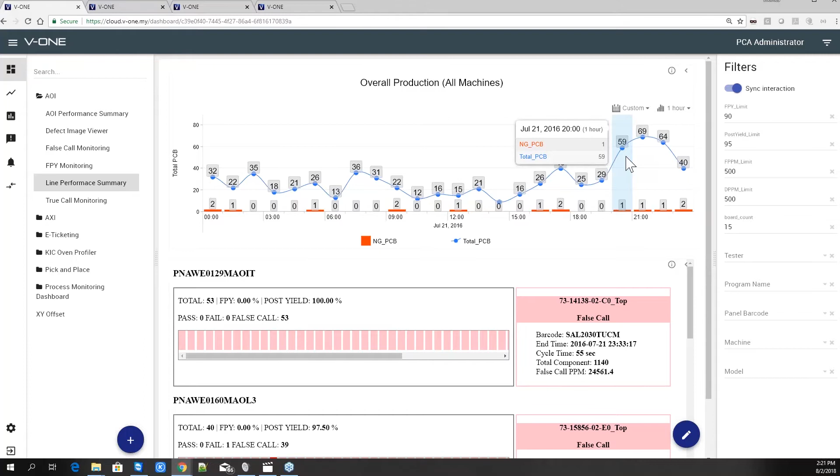So from here, as you can see, for the whole time trend, every single hour, the total NG-PCB and the total PCB inspected will be displayed, as well as, for that particular machine, the past 100 boards - how many false calls, how many true calls - and what model is currently running, what is the cycle time, total component, and so on.

This can basically help you to monitor your line in a real-time basis. The false call analysis allows you to analyze the false call by top part number, by device type, by reference designator, and there is also a pie chart for the false call breakdown. You can click on the model, and then all the other charts will filter accordingly.

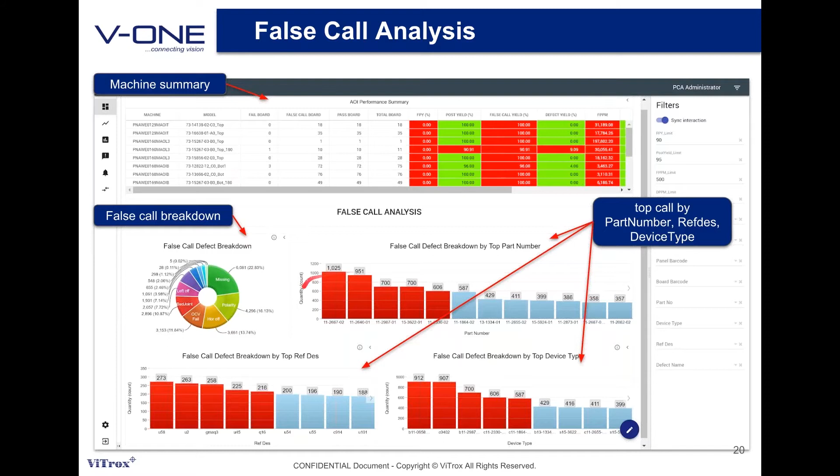This is what we call an interactive click. Besides that, we also allow you to do a right click on data you're interested in. For example, if you would like to understand the top part number causing the false call for that particular model, you can right click on that part number and click on the false call image list, and all the images for that particular bar will be displayed.

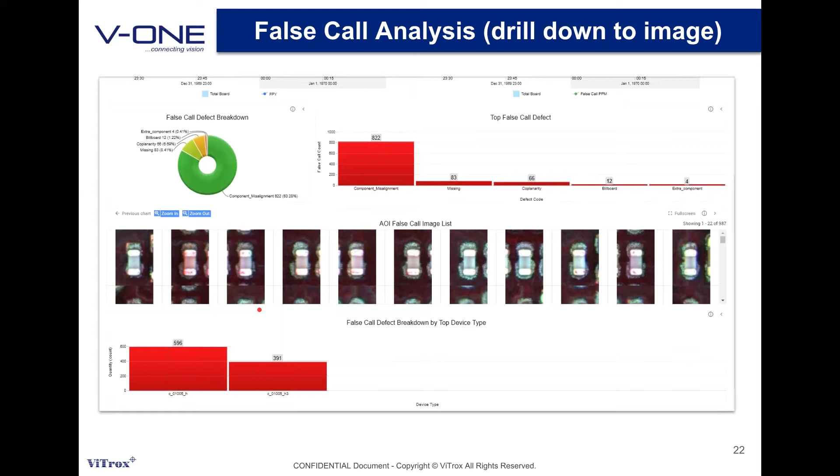Let me show you the live demo. For example, if this is the model you're interested in, when you click, the whole false call analysis chart will be filtered according to that particular model.

Same as this dashboard, if I'm interested in the top part number, for example this particular part number, I can right click, drill down, false call images list. You click on that and you can see that for that particular part number, all the images will be shown. This is very useful for engineers to do debugging on what is the top failure in the line, in real-time, easily.

I hope that this automatic synchronization, as well as the right-click drill down to images, can help production take immediate action to react to any abnormality found.

We also have a defects images viewer. This is also requested by a lot of customers.

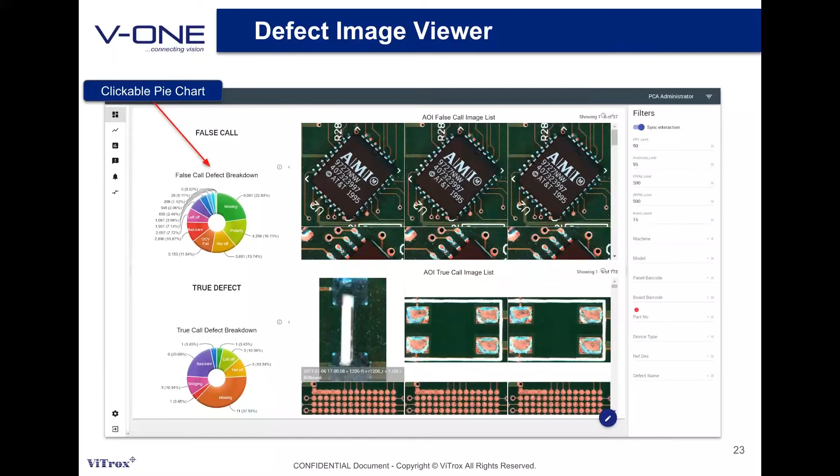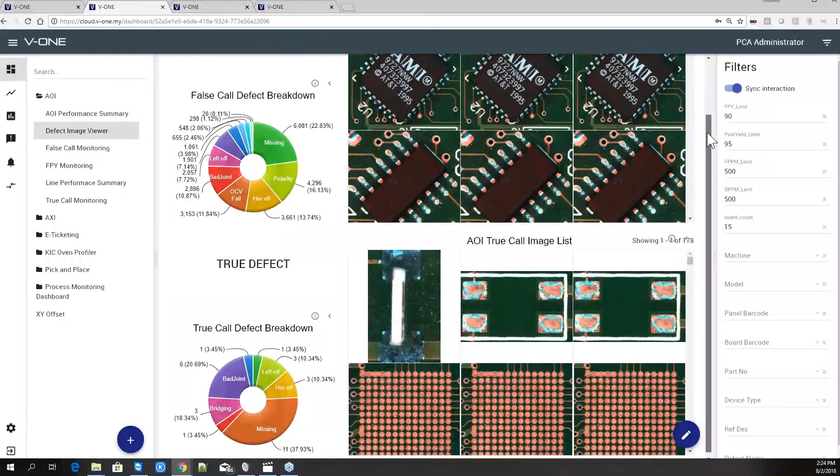With the interactive click, you could limit that particular information to maybe the last 1 hour. When you find that there are lots of missing, for example, you can click on that, and the whole image chart list can be filtered accordingly based on what you're interested in.

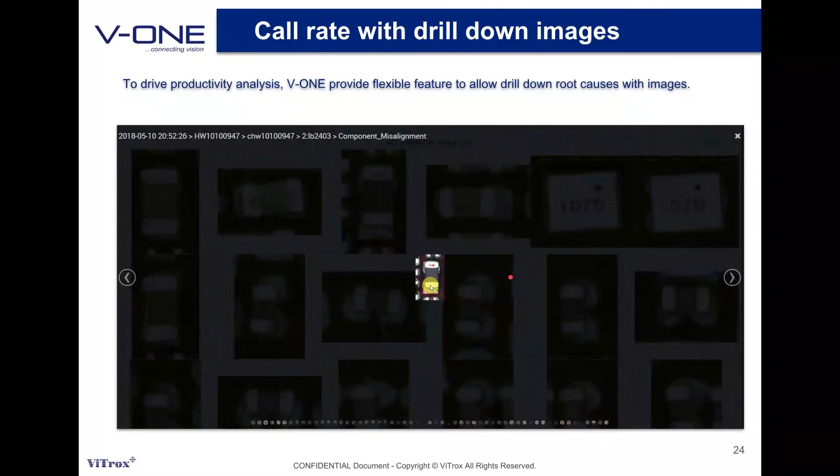This is a drill down. We have been promoting this a lot during version 2, but version 2 was unable to allow you to drill down components for that particular top defect to the images. It is now available in version 3.

For example, if you put a board into the machine, whenever it touches the sensors, the information will be generated and pushed to the cloud server. Then you are allowed to access the cloud server to take a look at the real-time status happening for that particular machine.

In the past, in version 2, we only had one of the features, such as the machine utilization calculation, as well as the real-time boards running on the line. But today, we also make it available for you to take a look at the summary of the utilization.

For example, let me select one of the machines. This is a summary dashboard on how you take a look at the daily machine utilization.

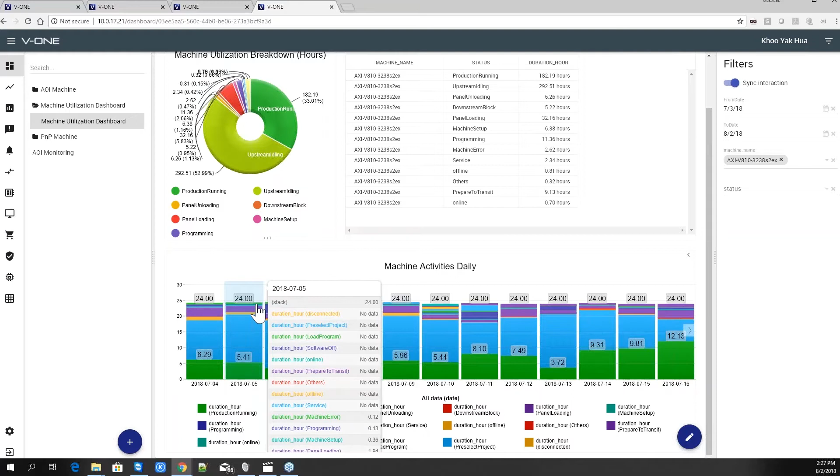From here, if I'm interested in how much downstream block, 5.22 hours, I can click on that, and because of the automatic synchronization feature, you can easily analyze what the downtime is across every day.

This is a very powerful feature for management in order to track whether they are utilizing the machine correctly, and this can basically help you improve and optimize your line utilization.

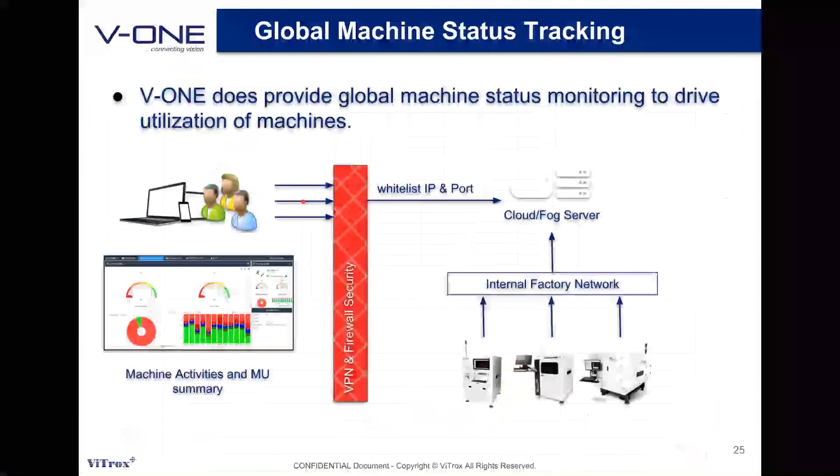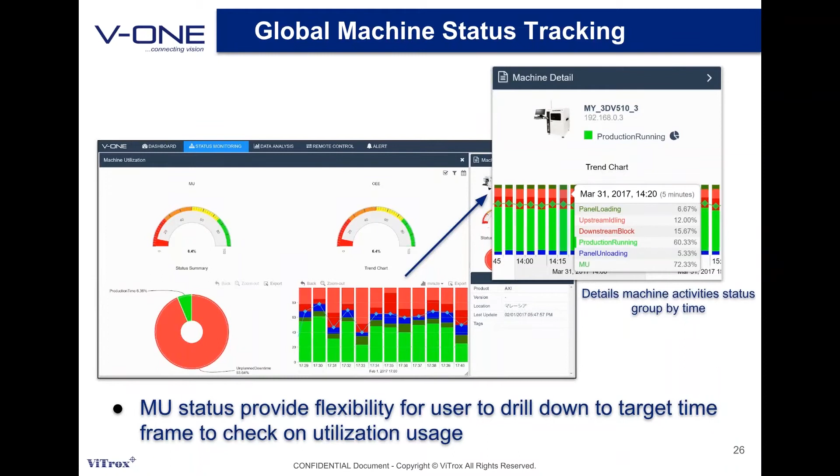This has the same features as version 2, where you can also drill down to that particular minute to see what happened on that particular machine. We have a lot of real-time monitoring dashboards that allow humans to take a look and drill down to the root cause.

But we are unable to ask the technician to always monitor that particular dashboard. With the upcoming version 3 features we are going to launch, this feature basically allows the production to drive real-time actions. For example, we have 2 lines, and moving towards Industry 4.0, we are going to reduce the technicians to only 1, whereas previously we had 2 technicians taking care of the line. From here, a control center is set up, and the V-ONE is installed.

If there is any abnormality, error, or high false call happening in the line, all the real-time data will be displayed in the control center. This is how one of our customers set up their production floor, running today. It helps them a lot to reduce their cost accordingly.

They have one operator controlling the control center. Whenever there's any abnormality found, the operator will open a ticket, and that ticket will be delivered to the technician's mobile phone in real-time. We will show you a live demo later on.

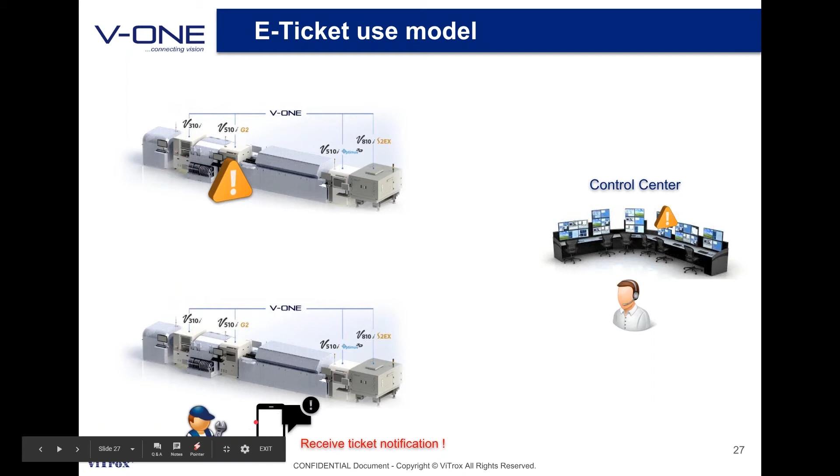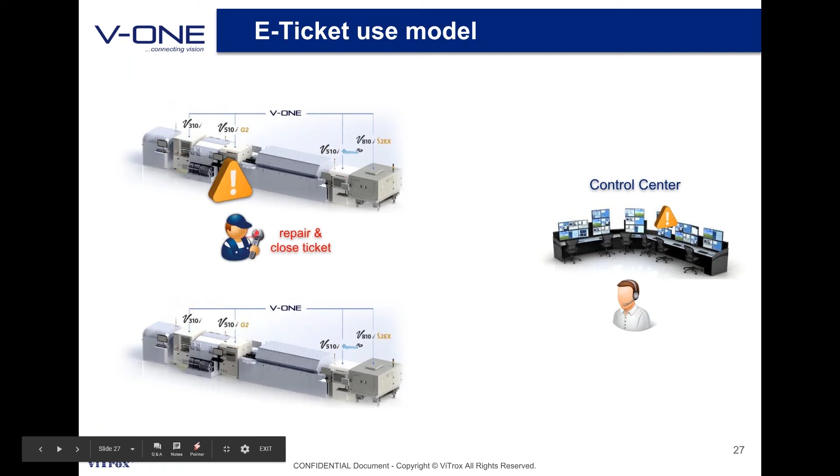So when the technician receives the notification, it tells them the problem is happening in line 1, and the technician will go over to line 1 to fix the problem. Once the problem is fixed, the technician can key in any comments or actions taken, then close the ticket, and finally the control center will receive confirmation that the problem is resolved.

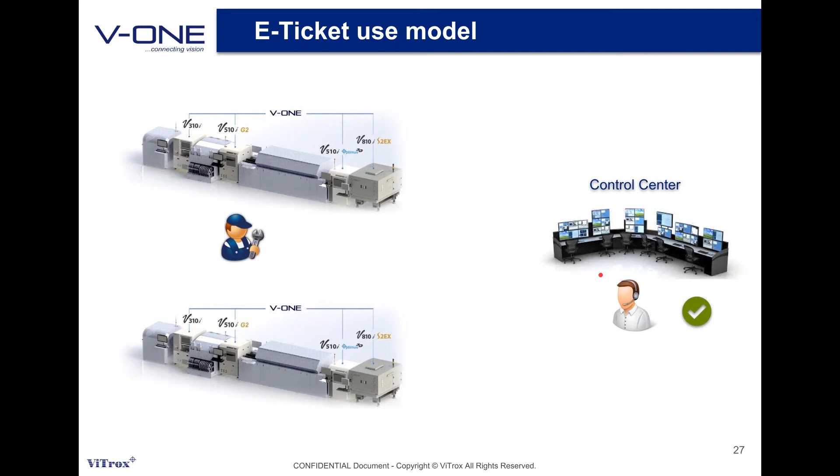From there, you can also generate a report for future training purposes. This is one live example that our customer is using today.

Whenever there's an AOI yield drop, we can either ask the operator to open the ticket, or set up an alert plan to automatically trigger this ticket from the system. For example, the username root represents an automatically triggered ticket. The tag category is AOI yield drop, from line 1, showing which machine. The problem is production yield drop.

Previously it was 99%, currently it's 98%. The issue shows which model, total boards run, pass boards, and fail boards. From here, the technician can take a look at what the problem is.

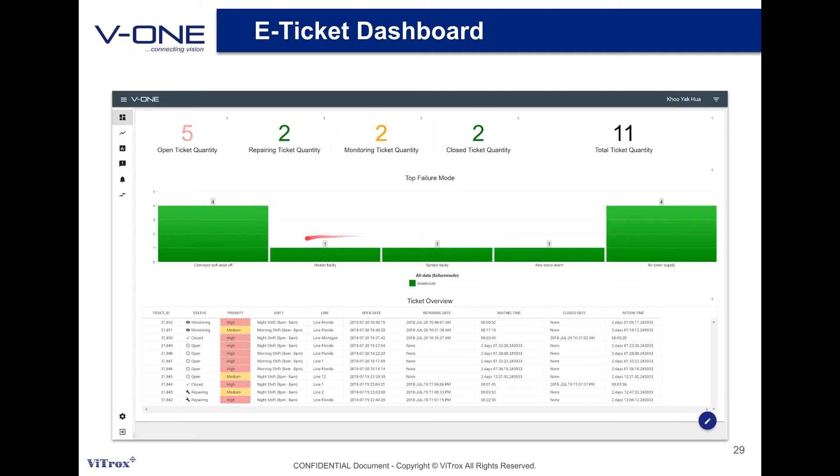This is the dashboard used by the operator control center. It displays how many tickets are open, currently repaired, monitored, closed, and the total ticket quantity for today. There's also a breakdown Pareto of different kinds of issues, as well as details of the tickets shown for today. I'm going to show a demonstration video.

Introducing the latest Industry 4.0 solution. Now enhanced with a mobile app version that will help you optimize your manufacturing process in real-time, alongside advanced features such as e-ticket notification.

When there is a problem with your machine, you can create a new ticket through the mobile app or other devices. There are a few customized e-ticket templates provided in V-ONE. You may request the V-ONE team to build a new template that specifically caters to your needs.

It is hassle-free to create and assign tasks to the engineers or user group of your preference. Once the e-ticket is submitted, the assigned engineer will receive a ticket notification on mobile simultaneously. They can add comments or mark it as repairing for the e-ticket progression.

After the stated issue has been resolved by the engineer, they will indicate the reason or remark to the manager for reference. The manager will receive a reply notification instantly. They can add comments, mark as monitoring, or mark as closed upon the issue. With these new features, your dream towards a no-touch line and smart manufacturing will be fulfilled in no time.

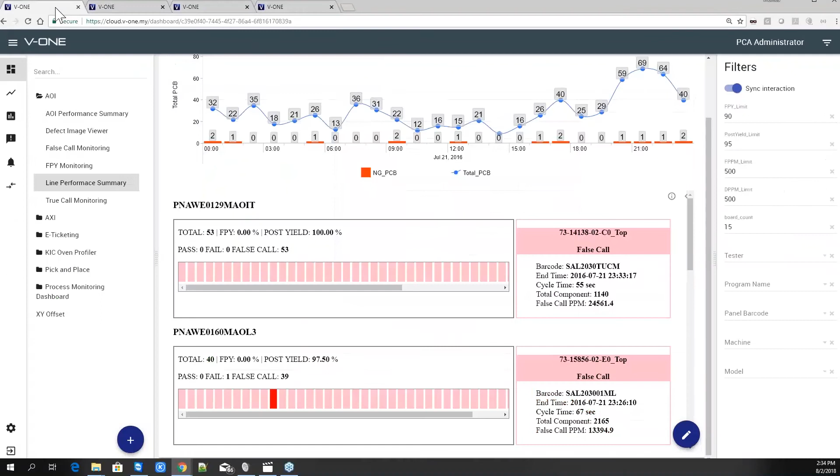Let me move to the settings. So the admin is allowed to create a ticket template. What is a ticket template? Basically, it's a subsystem. I'm now clicking the edit button.

For the first step, we are allowed to target who is the user for that particular ticket. In this case, we are targeting the technicians in the line. We also allow the user to configure what is the ticket's content.

This is the example that we showed in the video previously. If you find that you need to add another new field, you can always click the edit button here as the administrator, and then add a new field into the tickets. This will be the new field created, and then you can click on that. You can name what the name is for your ticket.

The most important portion will be the status. For example, we configured the ticket template so that whenever there's an open status, we only can proceed to repairing. When the technician clicks on repairing, you can see that we only allow moving to close, or if the issue requires monitoring, we can allow them to do monitoring. Whenever the ticket is under monitoring, we allow them to go to close, or they can go back to the repairing stage. Whenever there is a close, you couldn't do anything anymore on the ticket, but you can still add comments afterwards.

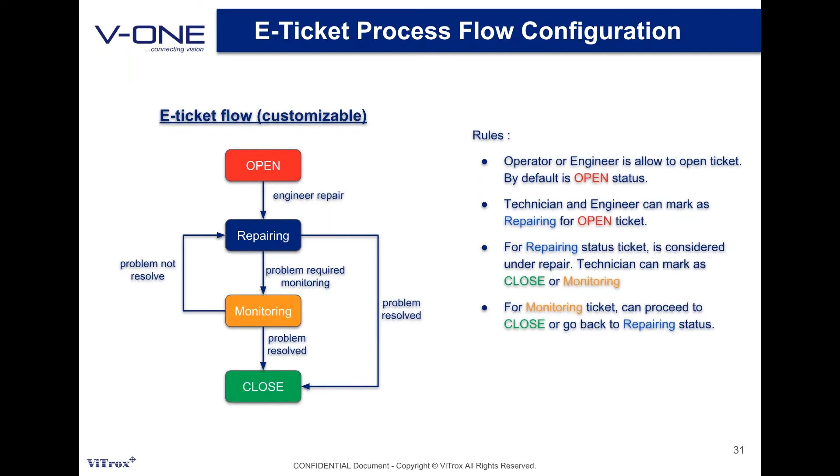So for the whole ticket template, we allow you to customize based on your production needs. You can even create a new QA monitoring system. Whenever there are any QA issues, we allow you to create the tickets, and then the notification will be delivered to the target audience, and eventually you can resolve the ticket on a real-time basis.

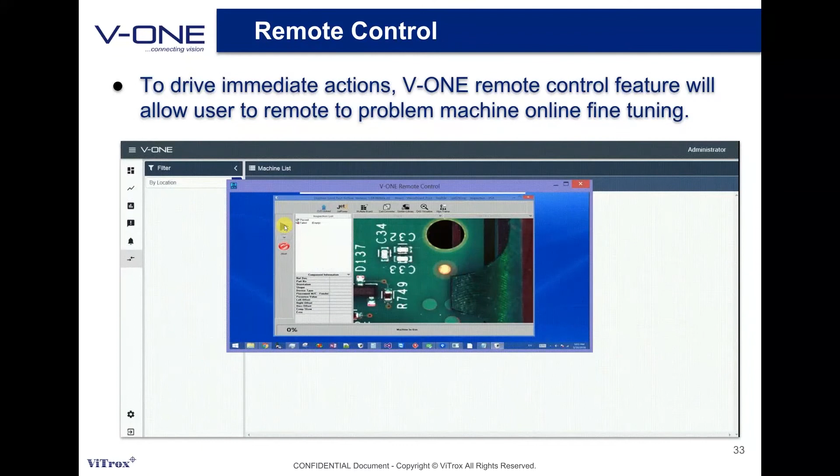Next, we are going to talk about process automation improvement. One of the topics we'll touch on today is conveyors. We have received a lot of requests for conveyor integration, smart buffer stacker communication. Today, we have made available 3 common protocols, depending on different process flows.

We allow you to connect using I/O directly to the PLC. The second one allows you to communicate using COM RS232. Lastly, this will be the preferred protocol, but it requires more high-end PLCs in order to communicate using TCP/IP.

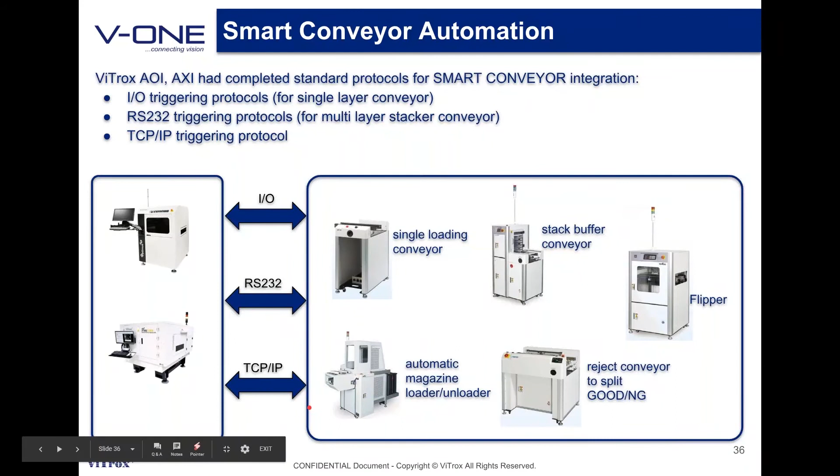This is one of the common use models today. In order to reduce the operator, we reduce the VVTS stations by connecting 2 or 4 AOI into one buy-off station. Whenever defects are found, the operator will buy off at the centralized VVTS station, and the defect results will be sent back to the machine, and we will communicate with the conveyor.

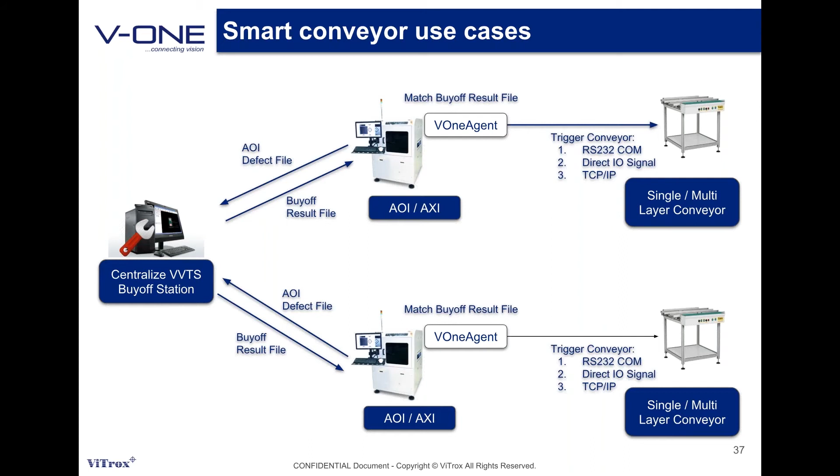For example, if slot 5 initially is a reject, and then the operator marks it as a pass board, the signal will be sent back to the machine, and the machine will communicate through the RS232 COM to the buffer stacker, telling it that slot 5 is a good board, and then the buffer stacker will release the board accordingly. We already made it available for the YJ-Link conveyor. For other types of conveyors, it will require certain customization work.

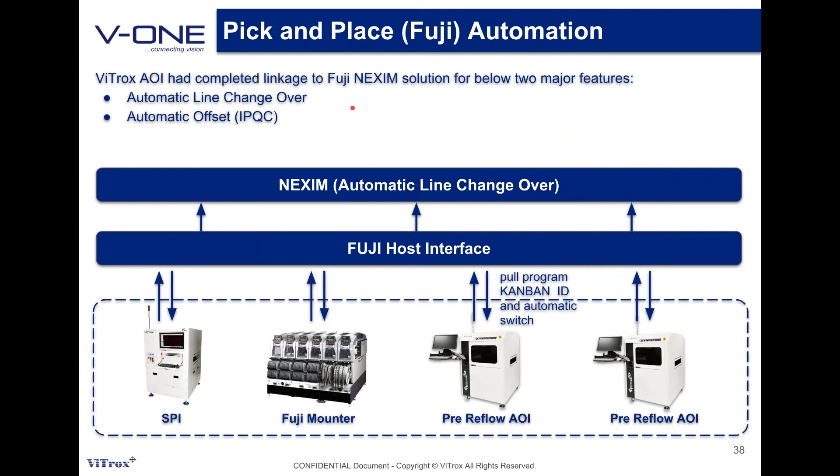Now we move to pick and place. For pick and place, we have a project with Fuji. One of the projects involves communicating through the Nexim solution, the Nexim software. The POC is done for the first phase, running on the production floor.

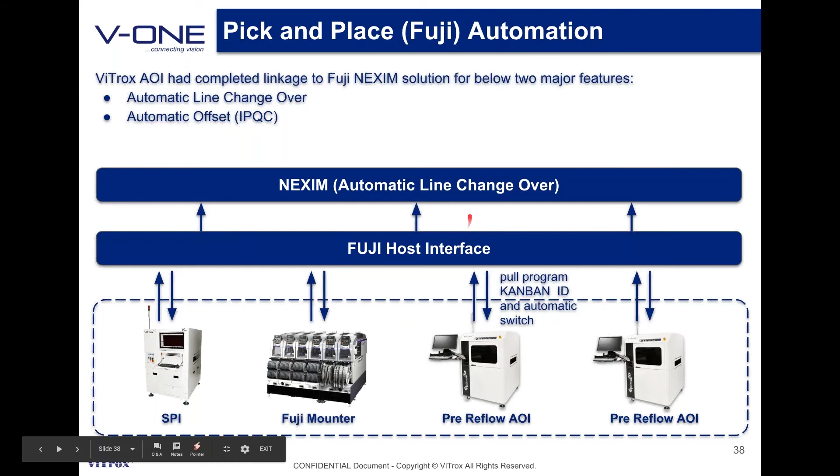What we are doing here is whenever the pre-reflow AOI inspection is done, the components' offset X and Y will be sent over through Nexim. When Nexim receives that particular result, let me proceed. When Nexim receives the results, it automatically calculates based on every 7 records. For example, we have some examples here.

Below is the CPI number. The CPI number represents 1 board's inspection results. So from here, every 7 cycles, the Nexim software will automatically calculate for every single component.

Is there any offset required? If the offset is out of the sigma value that the Fuji Nexim software calculated, it will automatically send the compensation value back to the mounters. From there, it will automatically offset for the next cycle.

For example, in this case there are 7 cycles. You can see that a 240 micron, 244 micron offset is basically detected in the pre-reflow AOI. After the compensation is done, it becomes lesser, nearer to 0 for the offset in placement. It continues to repeat after every 7 cycles.

This is also one of the real results that we collected from the POC line. Whenever the offset is found, after the automatic compensation from the Fuji software, the placement is much more stable afterwards.

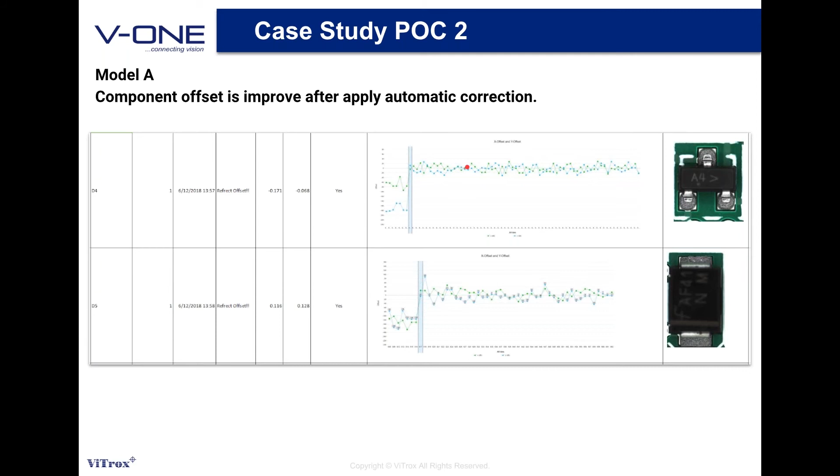This is the raw data that we collected. One of the images we can show here is a component placed with an offset, and after compensation it is placed more accurately in the center.

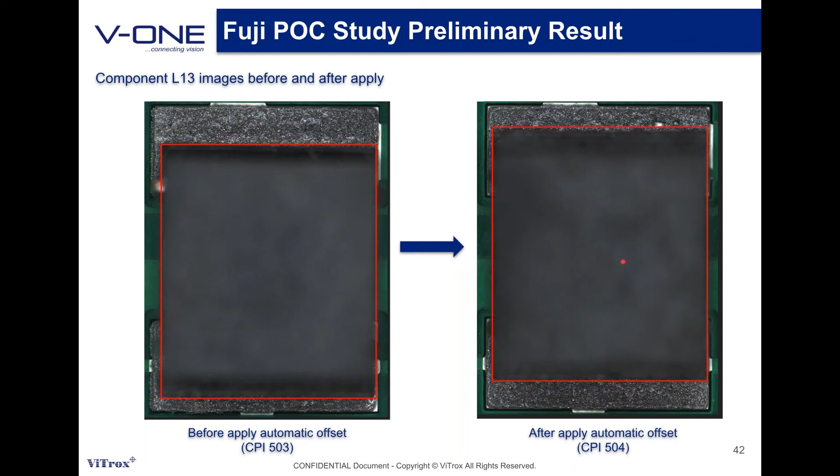Anyhow, for this particular project, the report has been done but is under discussion with Fuji R&D. We are unable to publish the full report yet. There are lots of constraints that we found. For example, if the Fuji machine hardware is not calibrated accordingly, or the AOI program isn't fine-tuned accordingly, this will result in the automatic offset not functioning well. We found that certain components don't correct well. There are lots of constraints and enhancements to be developed from Fuji as well as our ViTrox software. We are going to publish the report whenever it's available.

This is another project that we ran at one of our customer sites. The pick and place machine used is ASM, Siemens. From here, we could set up the pick and place nozzle, feeder, and head information into the AOI. Once the inspection is done, all the records are sent over to the V-ONE.

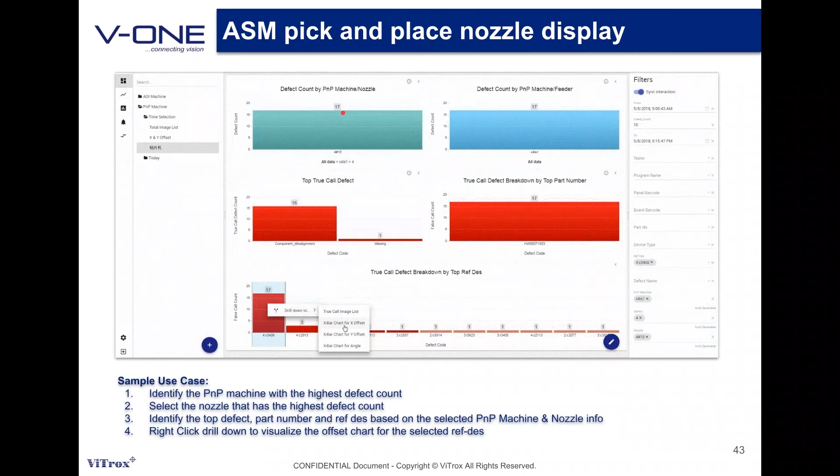The user is allowed to do a drill down - what is the top problem that happened, and which is the nozzle on the ASM machine. This is very much for analysis purposes. How the user uses that is, whenever there is a top failure found on a particular nozzle or feeder, the user goes back to the ASM machine to do fine tuning on that.

False call reduction project - there are lots of improvements done in the AOI. For example, the 3D AOI algorithm enhancement, the auto-learning during device assignment. Previously there were a lot of issues due to human error, or the algorithm being fine-tuned or assigned wrongly, resulting in a lot of false calls being detected on the production floor. Also, program library standardization, part library standardization, as well as a lot of hardware enhancement on the projector.

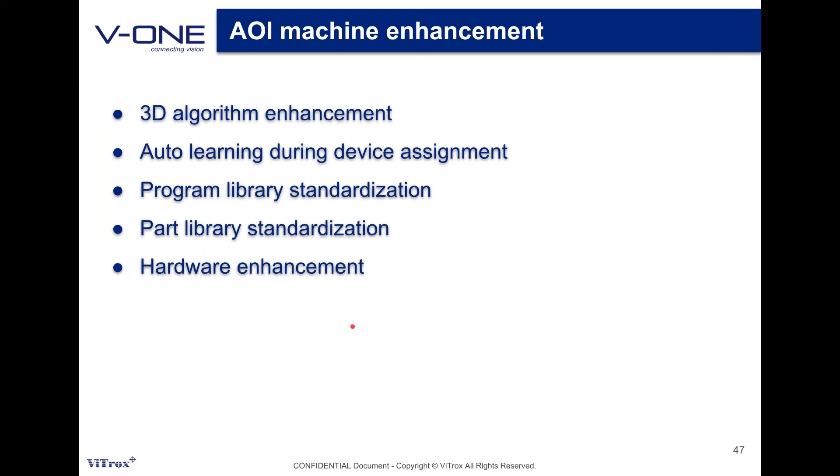For the X-ray projects, we collaborate with chip maker company I on AI judgment. All the results from the repair station are sent to our Fox server, and the AI is going to analyze based on the operator's action, and then based on learning from the past at least 50 boards, we will generate a classification model.

From here, whenever the next board comes into the buy-off station, we allow the operator to look into the probability score. For example, it will tell you that there is a 70% chance this part is defective. So this number can be utilized as a reference for the operator to do the judgment.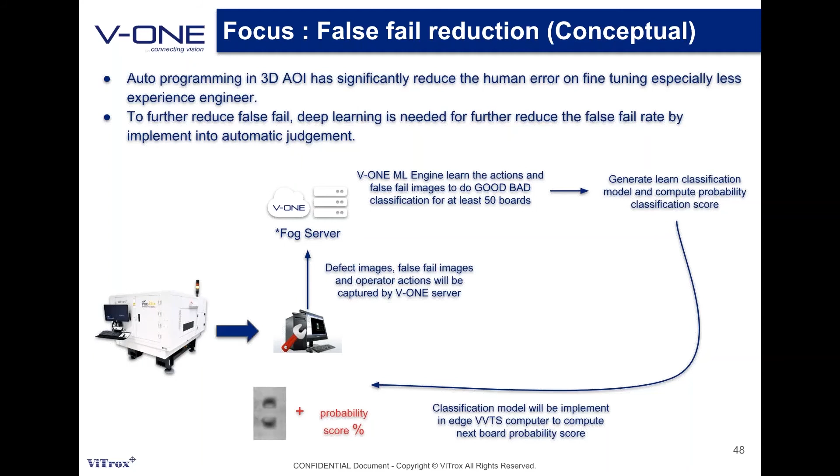The project is still under development. There are lots of algorithms and POC projects to be done. Once there are any reports, we will publish them in a future webinar.

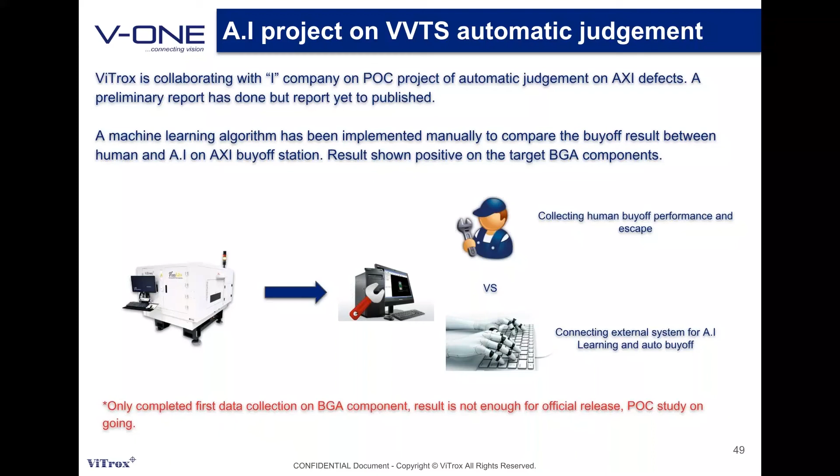We also allow any other third-party AI model to be integrated. We found that nowadays there is a lot of investment into AI, so if any customers would like to develop their own AI platform, we are very much welcome to have it integrated into our system as well. If you have any requests, you may refer to our customer care team in the future.

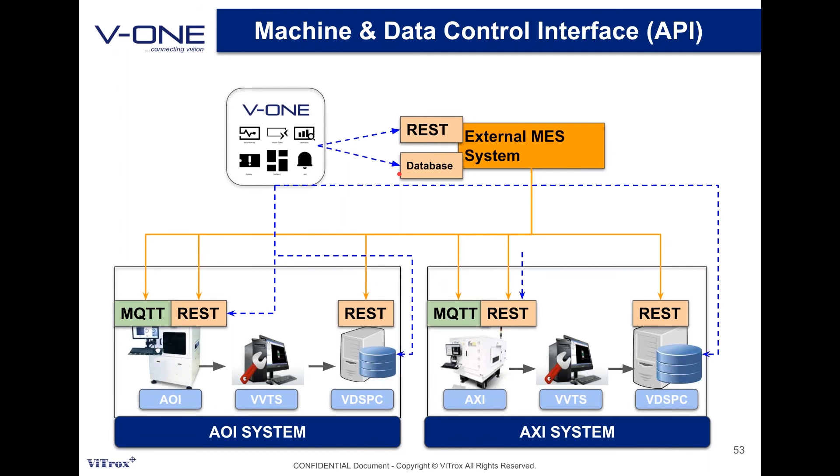Lastly, we would like to talk about the CFX and Hermes standards. V-ONE is an open platform where we support a lot of standardization on communication and protocol. Today, we allow many APIs installed in the machine or in the VDSPC, the SPC data warehouse. You can use a REST call to the VDSPC to pull the data into V-ONE or a third-party system, besides using the database connection directly.

There are lots of topics today. Let's talk about what is IPC CFX and also the Hermes standard.

A simple description for CFX is that it's meant for vertical integration. It is very similar to your MES, your shop floor, or your own IT shop floor system. All the data from the line will be sent vertically to your shop floor or database and stored there for future processing. That is what we call connected factory exchange.

CFX selected the AMQP protocol. Later on, we will have a link for you if you would like to understand more. It is basically a protocol supported by at least 30 SMT vendors. So moving forward, the format will be standardized and everyone will be talking the same language. It will be beneficial for the SMT vendor as well as the customer on how to tap on the data sent out from the SMT line.

Secondly, we have the Hermes standard. The Hermes standard is meant for horizontal integration, whereas information is passed from the first station to the second to the third. Take for example, as of today, the whole line is using SMEMA. The Hermes standard is going to officially replace and be announced as the IPC successor for SMEMA. SMEMA is for the board-available signals to the next station, and the next station.

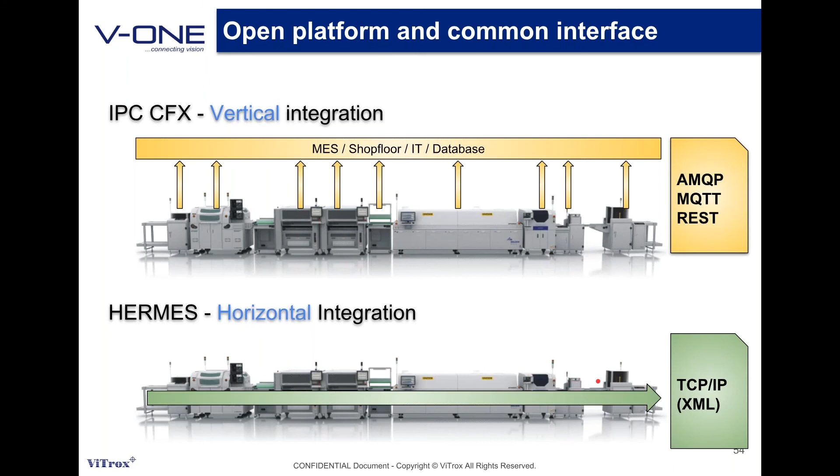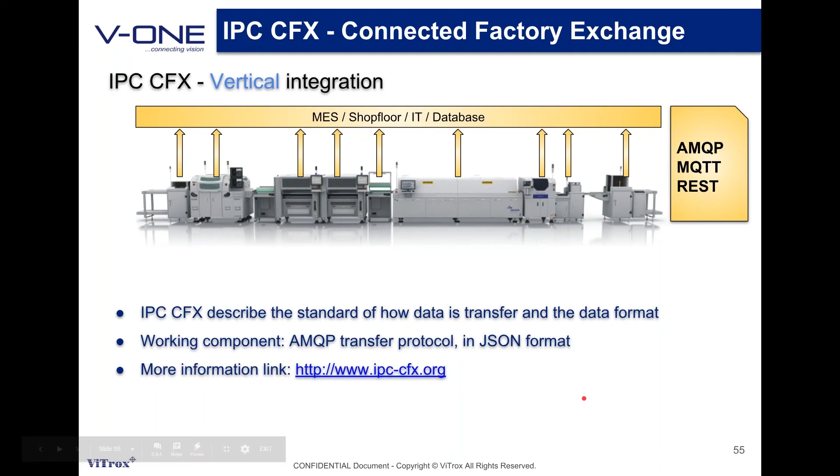If you would like to understand more on the IPC communication, you could visit www.ipc-cfx.org. There are many vendors already supporting these particular standards. The current working draft will be published, I think next month. You can visit this website to take a look at more details.

The Hermes standard will be officially announced as the IPC Hermes 9852. It will be the successor of IPC's SMEMA 9851. So if you would like to automatically open your conveyor, for example, you could refer to this IPC Hermes standard in the future. It is still under working development today.

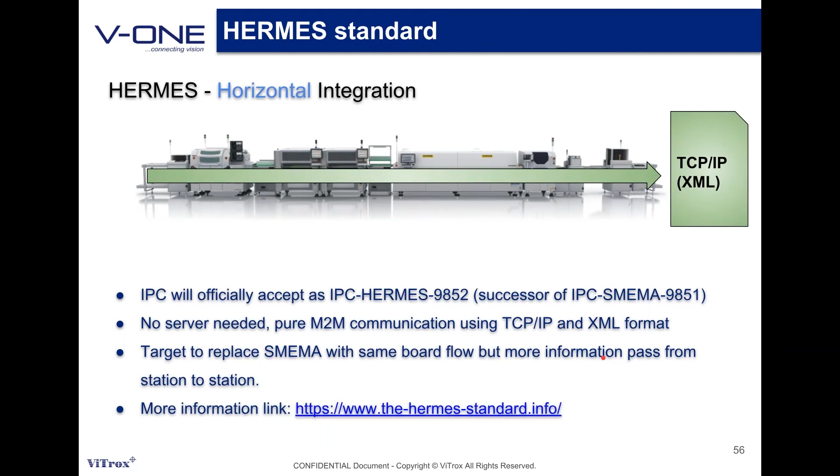Lastly, we would like to talk about our roadmap for the future. In the past, before 2017, we basically focused on platform development. So we focused on Linux, cloud, web technology, NoSQL databases, container Docker, and generic multi-DB adapter. Lots of effort was put into developing the correct platform for the next 10 years.

This year, we are focusing on application. The application is mainly for the SMT industry, where we understand what the needs are, what the key metrics are, what the abnormality detection rules are, machine monitoring, alert triggering, and so on. This is what we are going to focus on this year until the end.

In the past, we released version 2. There were lots of features being developed. And this year, we're releasing version 3 with e-tickets and the mobile application.

Upcoming, we will have a new data management module that will be added into V-ONE, to manage a large data pool from the machines. The S1 SPC and also the AI analytic collaboration project are undergoing development today.

Next year, we are going to focus a lot on the AI MLDL platform. By this year, we are going to complete the full data feeding from the AOI, SPI, X-ray, Oven, pick and place, so all the linkage will be done. Moving towards next year, we will very much focus on how to make use of the data.